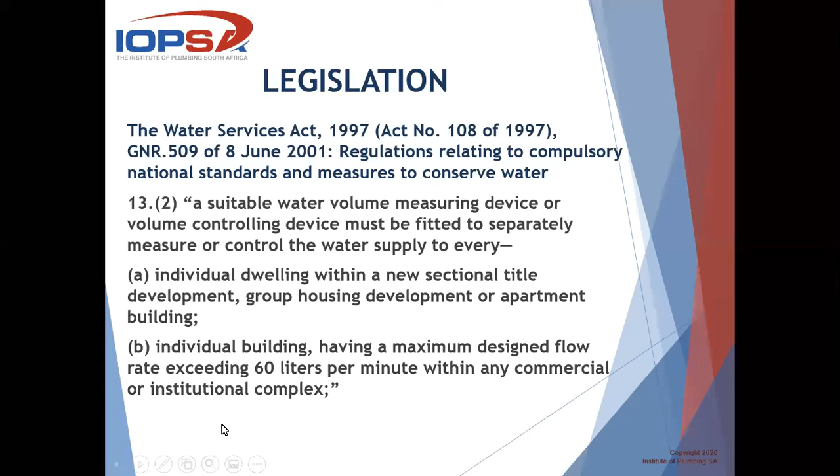Then it goes further to say also, as far as industrial is concerned, individual buildings having a maximum designed flow rate exceeding 60 liters per minute within any commercial or institutional complex. So we are going to deal mainly with the domestic situation today. So this is where it comes from and what the legislation says.

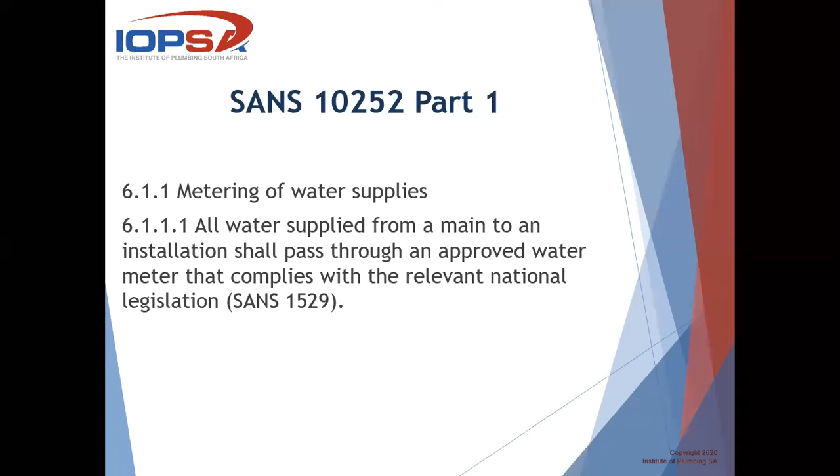Then in SANS 10252, water supply, part 1, clause 6.1.1, regarding the metering of water supplies, it says that all water supplied from a main to an installation shall pass through an approved water meter that complies with the relevant national legislation. And that SANS code regarding meters is 1529.

There's just a couple of examples of meters in the market out there. Some of the most commonly known ones are the Sensus, Siemens, Kent. Then there's also Altechnic, Banggood, ASM. So there's quite a number of these installations, including obviously prepaid meters. So these are just a couple of examples of those.

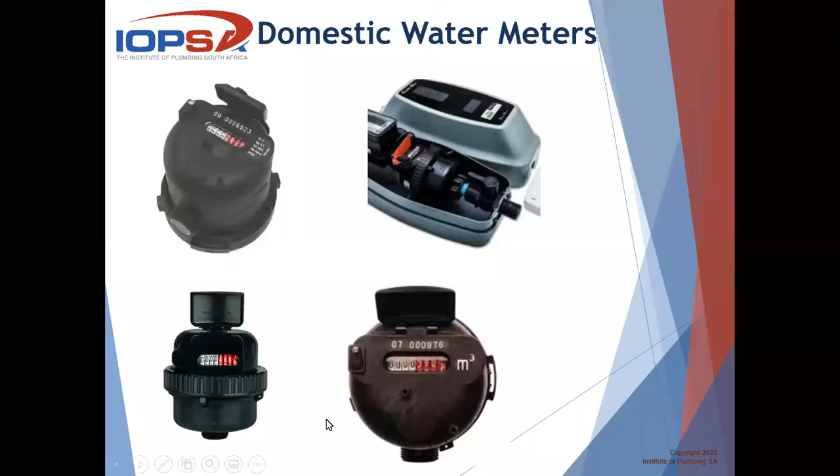Then if we go to the installation part of this, SANS 10252 part 1, 6.1.1.2 says, when so required, the following shall apply. A, the water meter shall be installed in a suitable location where it is easily accessible and maintainable. And you will know that in most instances, when we're talking about installation, there is obviously a need for access for maintenance, repairs, whatever needs to follow afterwards.

The installation conditions shall be in accordance with the manufacturer's specification. So that's one condition. You have to look and see how the manufacturer dictates these things need to happen, but in accordance with the standard, obviously. And just keep in mind that a manufacturer's specification cannot override the SANS code, which is a national regulation.

Meter installations size DN15 to DN40 shall include an upstream isolating valve. If not included in the water meter, an upstream strainer and downstream non-return valve shall be fitted. Now, if I can just stop at that point a little bit. You just need to be careful when you purchase a meter or when you get a meter from the supplier.

We have come across situations where the meter might have a strainer incorporated in the meter, but in terms of the SANS code for meters specifically, it also says that that strainer must be serviceable. So even though there might be a strainer incorporated, make sure that that strainer is serviceable. In other words, that you would be able to open it up and clean it. So just be careful of that.

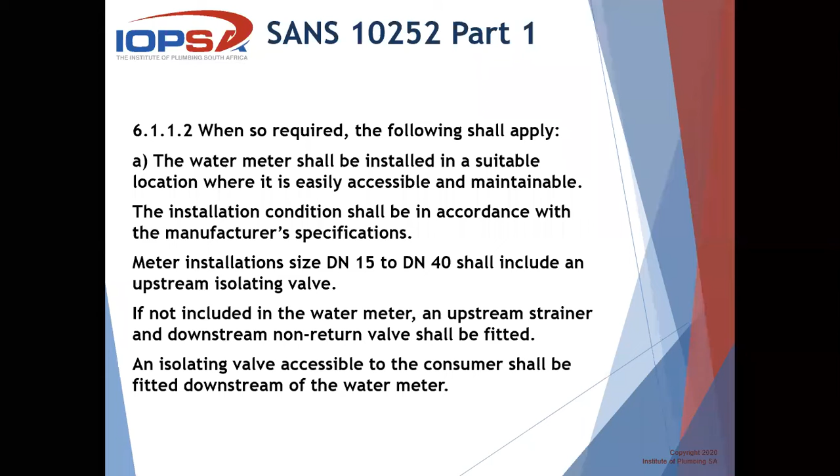And then the next thing is an isolating valve accessible to the consumer shall be fitted downstream of the water meter. So if we look at a couple of installations that we have come across in the recent past, you'll see there's a couple of incorrect ones. And as you can see, there's no isolating valves, strainers. There's a lot of things obviously not right.

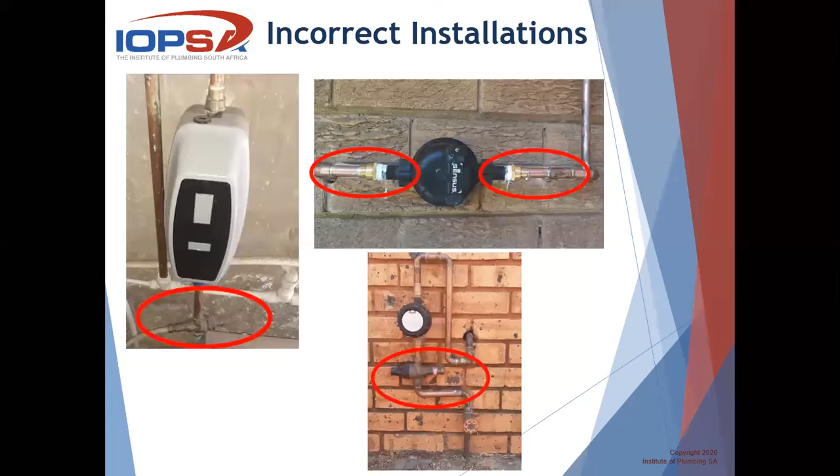And the photo on the right hand top is one that I've come across fairly recently, in one of the older buildings where they had a bulk meter. Now they have decided to go for individual meters. And it's quite obvious that the person that did this installation took a lot of shortcuts here. Just pulling out the water supply, connecting the meter and going back, nothing else in between.

So if we look at the correct way of installing, first of all, on the far left, if I can just get my laser pointer going. So here's our water supply, the main supply coming in. Then first off, the isolating valve. The next component is the strainer, and make sure that strainer is installed in the correct direction of flow. Then our water meter, whichever water meter you have. Next item is our non-return valve, and then again the isolating valve.

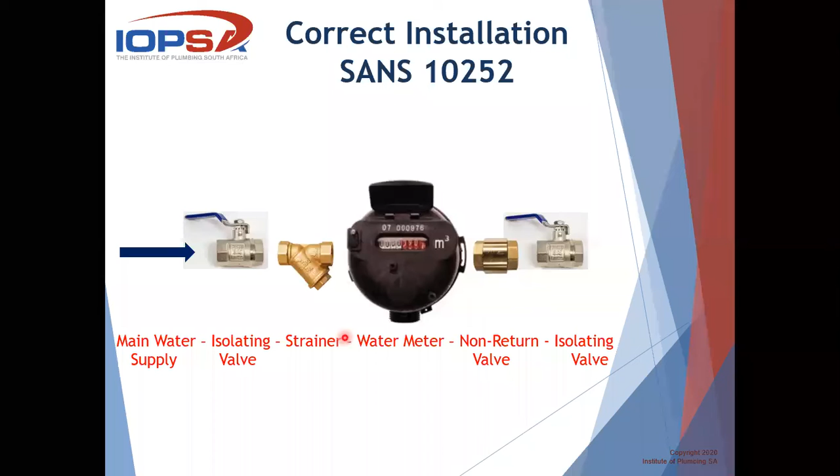So this is the basic way to do installations in terms of the regulation, as we saw before. So all of those components and all of those conditions in this instance have now been complied with. So please make sure that you do install this meter correctly.

Then if we move on to the next thing, they say, where meters are exposed to the elements in boundary or yard installation, the meter shall be installed in a protective meter box or manifold assembly. So in other words, you do find a lot in driveways or close to the driveway where these installations are being done. Then they're not always protected, and make sure that that installation is protected, although it must still be, as you know, accessible.

In addition, an additional isolating valve shall be fitted downstream of the water meter, either incorporated in the meter box or in the service connection to the consumer. So this now obviously depends on where this meter sits in relation to where the unit is. You find sometimes that all the meters are being installed together in a cluster, and then the draw-off lines go to the consumer.

So when there's a meter box, and it sometimes happens that these meter boxes are being locked, you need to take care and make sure that the service connection to the consumer also has an isolating valve, so that if something does go wrong, they can stop the water flow and close.

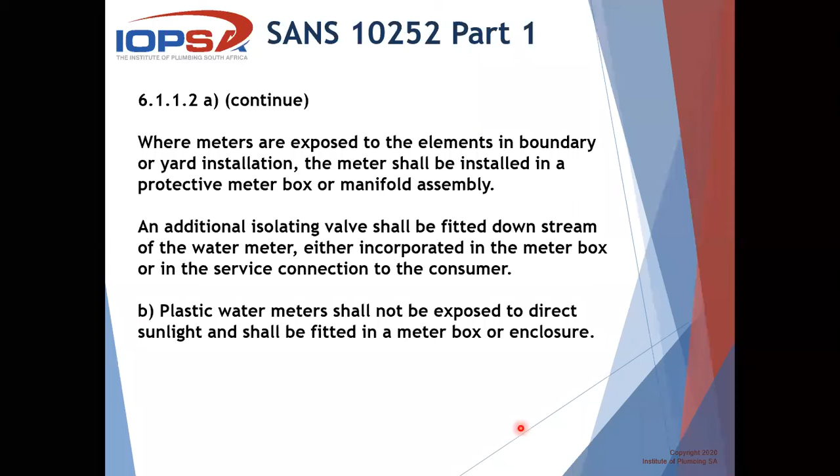So, I think most suppliers also carry boxes, but if you do need boxes and don't know where to get them, you can always make contact with one of us. We might be able to assist you in pointing you in the right direction. But as you know, Professor Google is a very good friend of mine, and I tend to find a lot of these things through Google. So yeah.

Right, moving along. Then 10252 goes further to say no connection shall be made to a communication pipe upstream of any water meter. In other words, no draw-off for garden taps or anything like that is allowed before or upstream of the water meter.

So just take care, and I think where you might have a bit of a challenge is in most of the older units, the ground floor units where they have gardens, because the garden tap might not be in the line that feeds the unit. So he would obviously try and not connect through the meter because he will have to pay for that water.